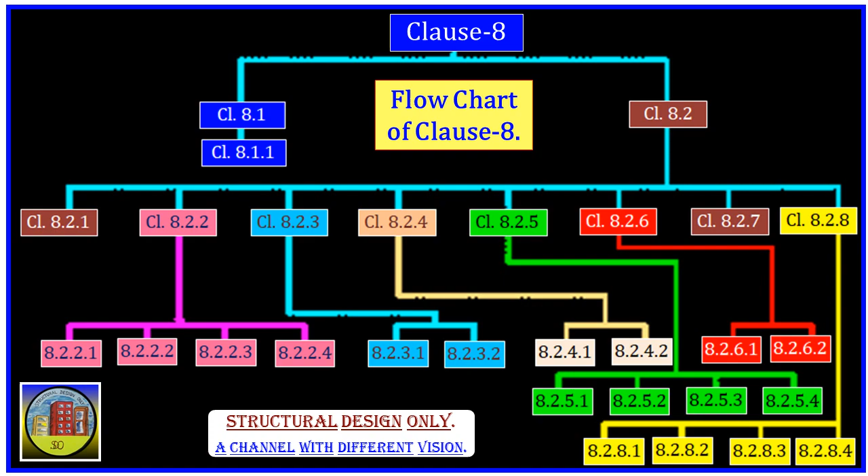Clause 8, Durability of Concrete. What is durability of concrete? Clause 8.1 gives us a general idea of the durability of concrete. A durable concrete is one that performs satisfactorily in the working environment during its anticipated exposure conditions during service. The materials and mix proportions specified and used should be such as to maintain its integrity and, if applicable, to protect embedded metal from corrosion.

Clause 8.1.1: One of the main characteristics influencing the durability of concrete is its permeability to the ingress of water, oxygen, carbon dioxide, chloride, sulfate and other potentially deleterious substances. Impermeability is governed by the constituents and workmanship used in making the concrete. With normal weight aggregates, a suitably low permeability is achieved by having an adequate cement content, sufficiently low free water/cement ratio, by ensuring complete compaction of the concrete, and by adequate curing.

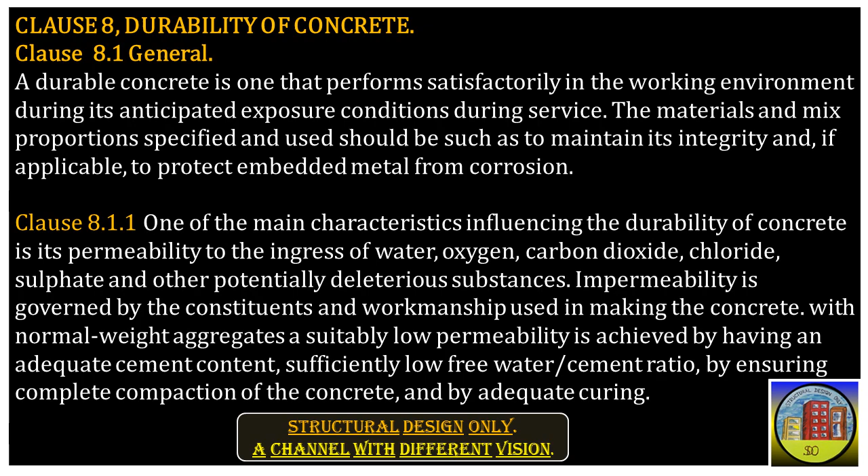The factors influencing durability include: A. The environment. B. The cover to embedded steel. C. The type and quality of constituent materials. D. The cement content and water to cement ratio of the concrete. E. Workmanship, to obtain full compaction and efficient curing, and F. the shape and size of the member.

These points are also important for examination purposes. The degree of exposure anticipated for the concrete during its service life together with other relevant factors relating to mix composition, workmanship, design, and detailing should be considered. The concrete mix to provide adequate durability under these conditions should be chosen taking account of the accuracy of current testing regimes for control and compliance as described in the standard.

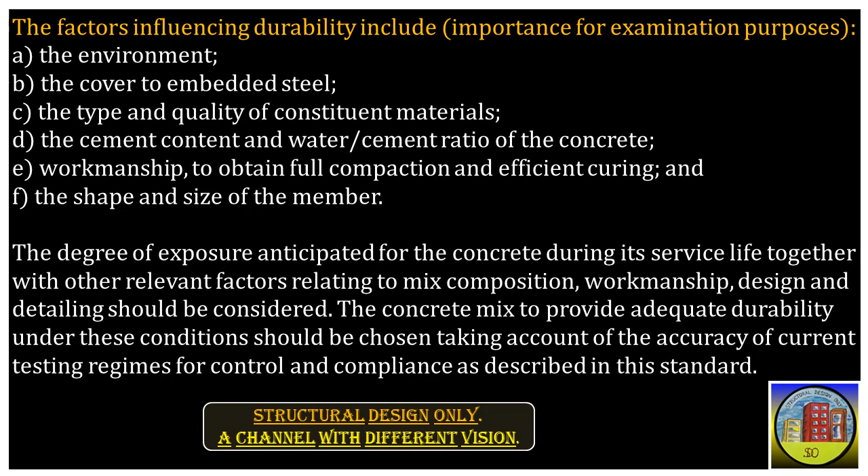Clause 8.2, Requirements for Durability. As I've shown in my flow chart, this clause has 8 subclauses, from 8.2.1 to 8.2.8. Clause 8.2.1, Shape and size of member.

The shape or design details of exposed structures should be such as to promote good drainage of water and to avoid standing pools and rundown of water. Care should also be taken to minimize any cracks that may collect or transmit water. Adequate curing is essential to avoid the harmful effects of early loss of moisture.

See 13.5. Member profiles and their intersections with other members shall be designed and detailed in a way to ensure easy flow of concrete and proper compaction during concreting.

Concrete is more vulnerable to deterioration due to chemical or climatic attack when it is in thin sections, in sections under hydrostatic pressure from one side only, in partially immersed sections and at corners and edges of elements.

The life of the structure can be lengthened by providing extra cover to steel, by chamfering the corners or by using circular cross sections or by using surface coatings which prevent or reduce the ingress of water, carbon dioxide or aggressive chemicals.

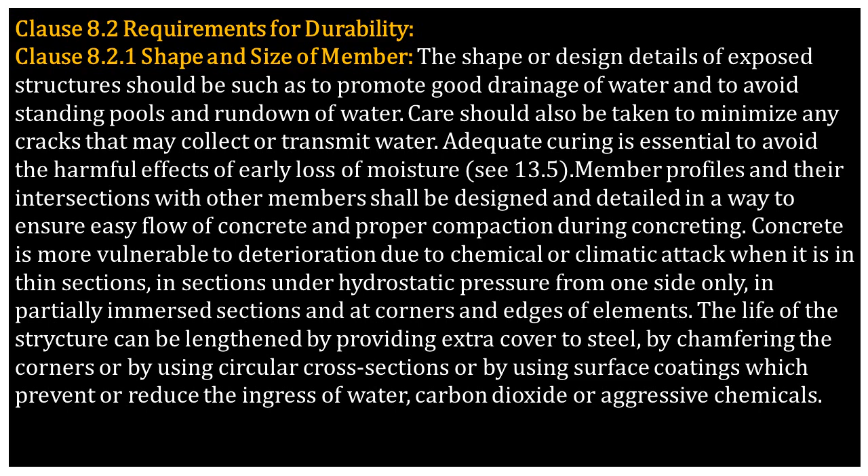Clause 8.2.2, Exposure Conditions. Under Clause 8.2.2 there are 4 subclauses, Clause 8.2.2.1 to Clause 8.2.2.4. This is Clause 8.2.2.1, General Environment. The general environment to which the concrete will be exposed during its working life is classified into 5 levels of severity, that is, mild, moderate, severe, very severe and extreme as described in Table 3.

Table 3, Environmental Exposure Conditions. It explains Clause 8.2.2.1 and Clause 35.3.2, here we are focusing on Clause 8.2.2.1 only. In Table 3, we have 3 columns.

Column number 1 is serial number. Column number 2 is environment. Column number 3 is exposure conditions.

Serial number 1, environment mild, exposure condition: concrete surfaces protected against weather or aggressive conditions, except those situated in coastal area.

Serial number 2, environment moderate, exposure condition: concrete surfaces sheltered from severe rain or freezing whilst wet, concrete exposed to condensation and rain, concrete continuously under water, concrete in contact or buried under non-aggressive soil or groundwater, concrete surfaces sheltered from saturated salt air in coastal area.

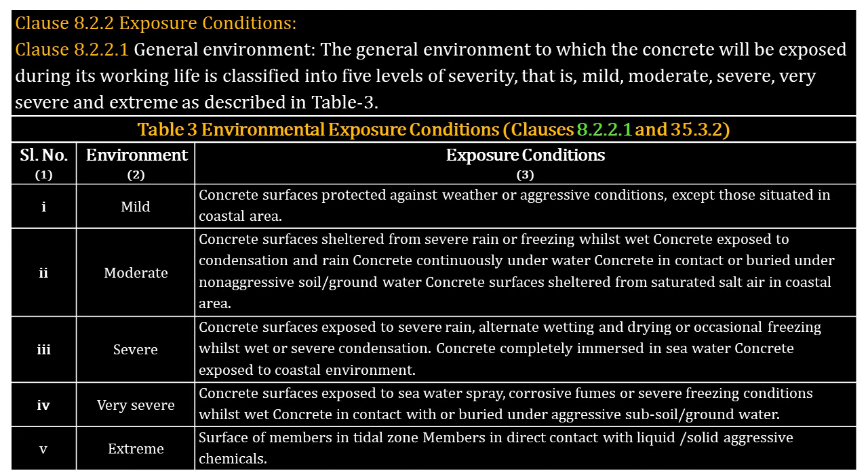When we talk about abrasive surfaces in construction, we are referring to those that are rough, harsh, gritty, corrosive, or otherwise challenging to work with. Think of surfaces that scratch, feel coarse, erode, or require grinding. Now, in situations where we encounter such surfaces, it's crucial to understand how to address them effectively.

This is where Clause 8.2.2.2 comes into play, providing valuable insights and guidelines. Let us explore its significance together. Clause 8.2.2.2, Abrasive: specialist literature may be referred to for durability requirements of concrete surfaces exposed to abrasive action, for example, in case of machinery and metal tires.

Clause 8.2.2.3, Freezing and thawing: where freezing and thawing actions under wet conditions exist, enhanced durability can be obtained by the use of suitable air entraining admixtures. When concrete lower than grade M50 is used under these conditions, the mean total air content by volume of the fresh concrete at the time of delivery into the construction should be as follows.

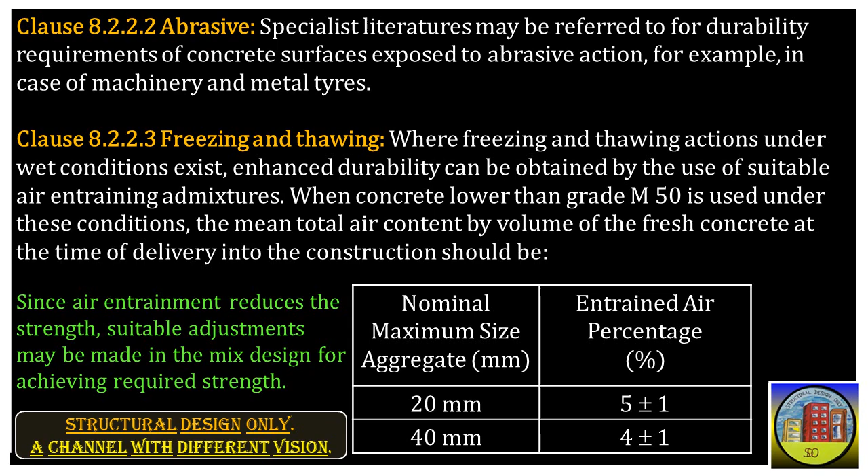Now, let's delve into Clause 8.2.2.4, Exposure to sulfate attack. Table 4 provides recommendations for the type of cement, maximum free water to cement ratio, and minimum cement content necessary at different sulfate concentrations in near neutral groundwater with a pH of 6 to 9.

In cases of very high sulfate concentrations in Class 5 conditions, it is advisable to employ some form of lining such as polyethylene or polychloroprene sheeting, or surface coatings based on asphalt, chlorinated rubber, epoxy, or polyurethane materials to prevent access by the sulfate solution.

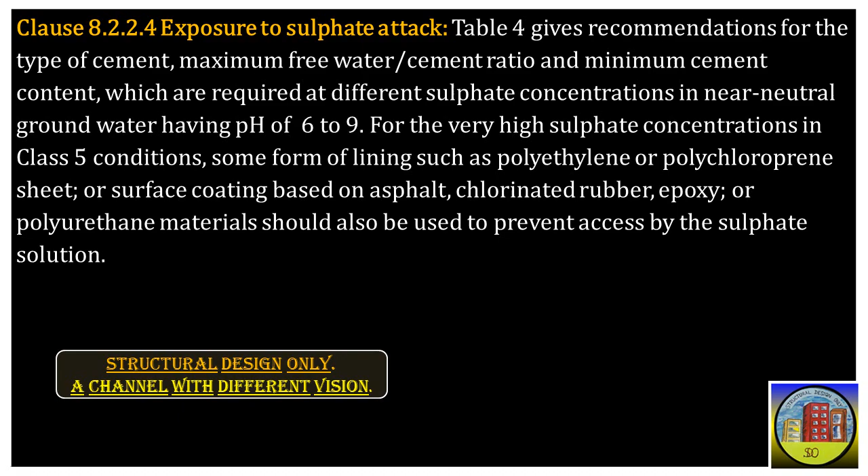This is our Table 4 as I mentioned in my last slide, requirements for concrete exposed to sulfate attack. Clauses 8.2.2.4 and 9.1.2. Currently, our focus is on Clause 8.2.2.4. This table comprises 5 main columns and 5 rows.

The first column is for serial numbers. The second column is for class designation. The third column is for concentration of sulfates, expressed as SO3, which further divides into 3 sub-columns: total SO3 in percentage, SO3 in 2:1 water to soil extract measured in grams per liter, and SO3 in groundwater measured in grams per liter.

The fourth column is for type of cement. The fifth column is for dense, fully compacted concrete made with 20 mm nominal maximum size aggregates complying with IS 383, which further divides into two columns: minimum cement content in kilograms per cubic meter, and maximum free water cement ratio.

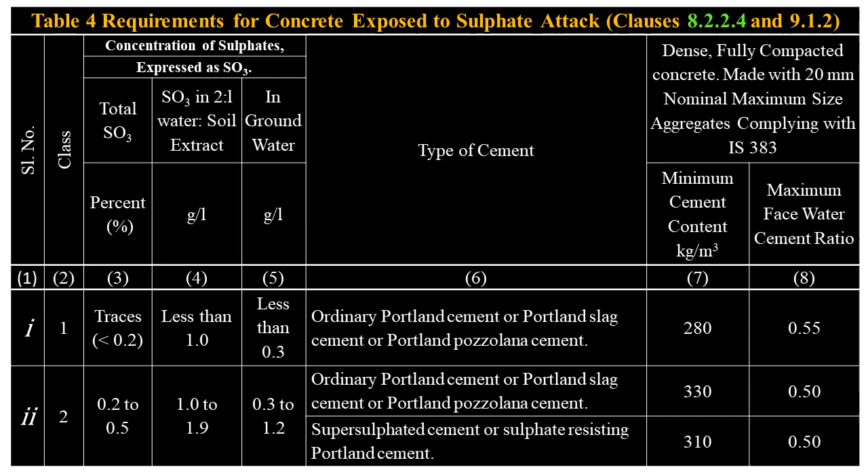Type of cements: supersulfated cement or sulfate-resisting Portland cement. Minimum cement content, 310 kilograms per cubic meter. Maximum free water-cement ratio, 0.5.

In this slide, we will continue discussing Table 4, Requirements for Concrete Exposed to Sulfate Attack, Clauses 8.2.2.4 and 9.1.2. Serial number 3, class designation 3. Total SO3 in percentage, 0.5 to 1%. SO3 in ratio of 2:1 water to soil extract, 1.9 to 3.1 grams per liter. SO3 in groundwater, 1.2 to 2.5 grams per liter.

Type of cements: supersulfated cement or sulfate-resisting Portland cement. Minimum cement content, 330 kilograms per cubic meter. Maximum free water-cement ratio, 0.5. Type of cements: Portland pozzolana cement or Portland slag cement. Minimum cement content, 350 kilograms per cubic meter. Maximum free water-cement ratio, 0.45.

Serial number 4, class designation 4. Total SO3 in percentage, 1 to 2%. SO3 in ratio of 2:1 water to soil extract, 3.1 to 5 grams per liter. SO3 in groundwater, 2.5 to 5 grams per liter. Type of cements: supersulfated or sulfate-resisting Portland cement. Minimum cement content, 370 kilograms per cubic meter. Maximum free water-cement ratio, 0.45.

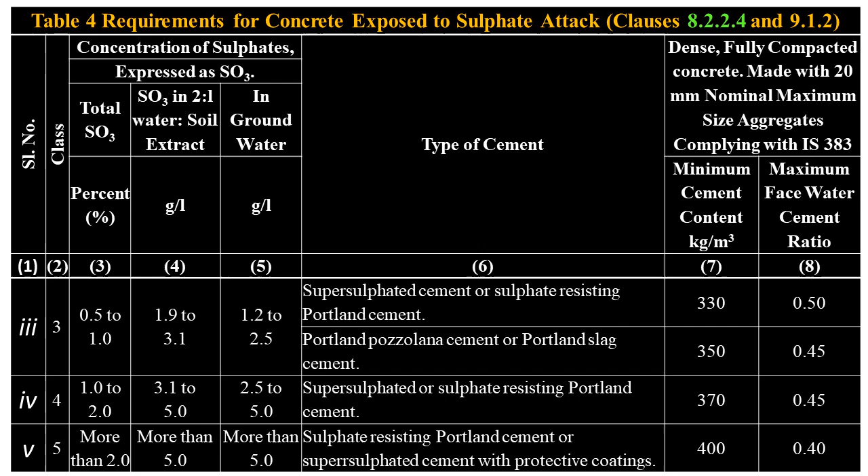Below Table 4, there are 7 important notes regarding requirements for concrete exposed to sulfate attack. They are as follows: 0.1 Cement content given in this table is irrespective of grades of cement. 0.2 Use of supersulfated cement is generally restricted where the prevailing temperature is above 40 degrees Celsius. 0.3 Supersulfated cement gives an acceptable life provided that the concrete is dense and prepared with a water-cement ratio of 0.4 or less, in mineral acids, down to pH 3.5.

0.4 The cement contents given in column 6 of this table are the minimum recommended. For sulfate contents near the upper limit of any class, cement contents above these minimum are advised.

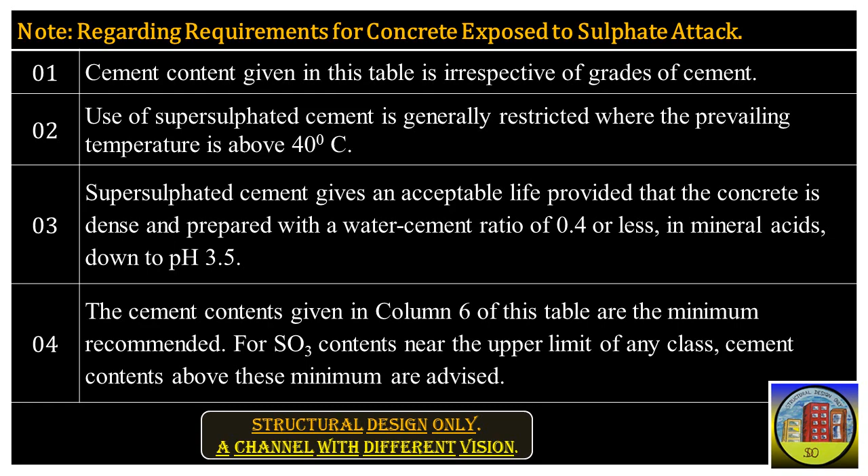This slide continues the discussion of notes below Table 4. 0.5 For severe conditions, such as thin sections under hydrostatic pressure on one side only and sections partly immersed, consideration should be given to a further reduction of water-cement ratio.

0.6 Portland slag cement conforming to IS 455 with slag content more than 50% exhibits better sulfate-resisting properties.

0.7 Where chloride is encountered along with sulfates in soil or groundwater, ordinary Portland cement with C3A content from 5 to 8% shall be desirable to use in concrete, instead of sulfate-resisting cement. Alternatively, Portland slag cement conforming to IS 455 having more than 50% slag, or a blend of ordinary Portland cement and slag, may be used provided sufficient information is available on the performance of such blended cements in these conditions. Additionally, C3A stands for tricalcium aluminate.

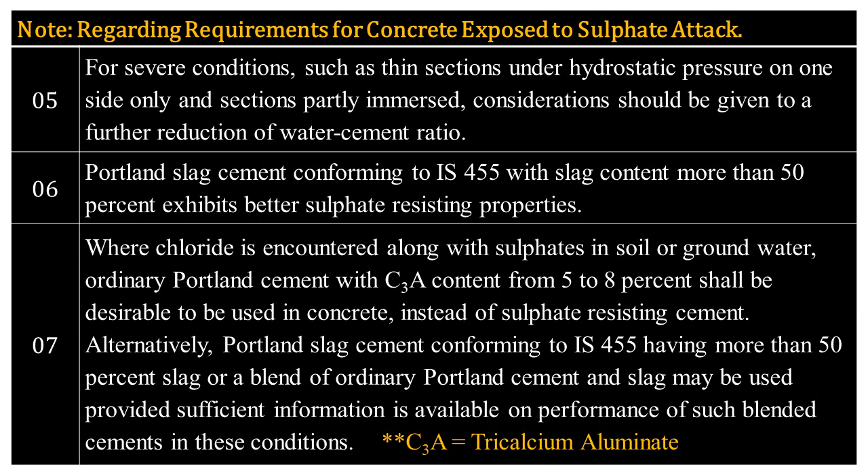On this slide, we're focusing on Clause 8.2.4, which deals with concrete mix proportions. Within Clause 8.2.4, there are 2 subclauses, namely 8.2.4.1 and 8.2.4.2. Let's begin by examining Clause 8.2.4.1, General. The free water-cement ratio is an important factor in governing the durability of concrete and should always be the lowest value.

Appropriate values for minimum cement content and the maximum free water-cement ratio are given in Table 5 for different exposure conditions. The minimum cement content and maximum water-cement ratio apply to 20 mm nominal maximum size aggregate. For other sizes of aggregate they should be changed as given in Table 6.

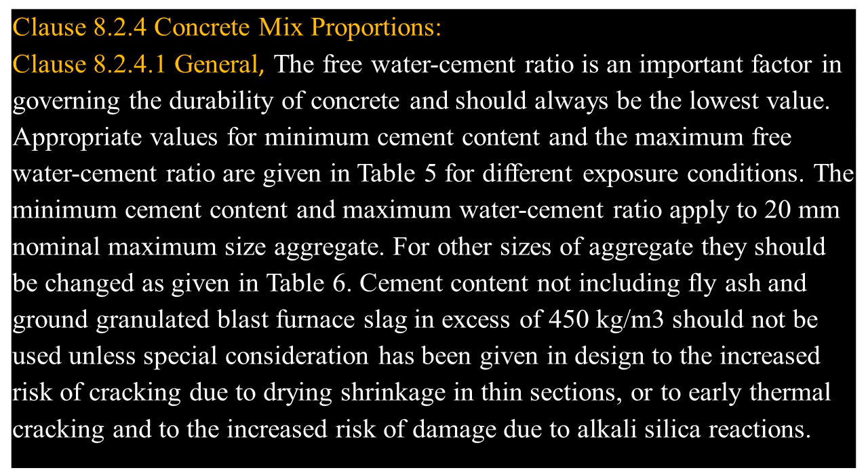Cement content not including fly ash and ground granulated blast furnace slag in excess of 450 kg per cubic meter should not be used unless special consideration has been given in design to the increased risk of cracking due to drying shrinkage in thin sections, or to early thermal cracking and to the increased risk of damage due to alkali-silica reactions.

In the preceding slide, I introduced 2 tables, Table 5 and Table 6. Let's focus on Table 5. This table provides insights into the appropriate values for minimum cement content and the maximum free water-cement ratio across various exposure conditions. The title of Table 5 is Minimum Cement Content, Maximum Water-Cement Ratio, and Minimum Grade of Concrete for different exposures with normal weight aggregates of 20 mm nominal maximum size, referencing clauses 6.1.2, 8.2.4.1, and 9.1.2.

Table 5 comprises 4 main columns and 5 rows. The first column serves as a serial number identifier, while the second column delineates exposure conditions. Moving to the third column, it addresses plain concrete, further subdivided into 3 subcolumns. These subcolumns detail the minimum cement content in kilograms per cubic meter, the maximum free water to cement ratio, and the minimum grade of concrete required.

Similarly, the fourth column focuses on reinforced concrete, also divided into 3 subcolumns. Here, we find specifications for minimum cement content, maximum free water to cement ratio, and minimum grade of concrete, pertinent to reinforced concrete structures.

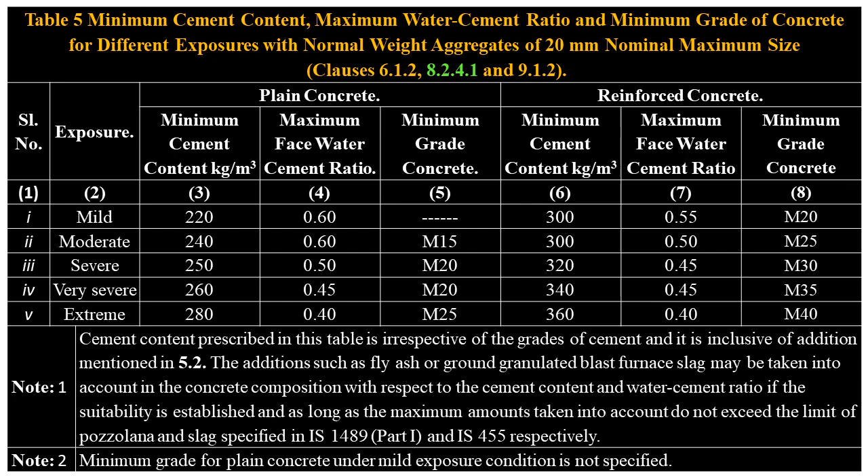Note 2: it's worth noting that the minimum grade for plain concrete under mild exposure conditions is not specified.

On this slide, you'll encounter Table 6, which details adjustments to minimum cement contents for aggregates other than 20 mm nominal maximum size, as per Clause 8.2.4.1. Additionally, Clause 8.2.4.2 addresses maximum cement content.

Table 6 consists of 3 columns and 3 rows. The first column functions as a serial number identifier. In the second column, the nominal maximum aggregate size is specified in millimeters. Transitioning to the third column, it pertains to the adjustments to minimum cement contents as outlined in Table 5, expressed in kilograms per cubic meter.

Serial number 1: nominal maximum aggregate size 10 mm, adjustment to minimum cement contents in Table 5, plus 40 kilograms per cubic meter. Serial number 2: nominal maximum aggregate size 20 mm, adjustment 0 kilograms per cubic meter. Serial number 3: nominal maximum aggregate size 40 mm, adjustment minus 30 kilograms per cubic meter. Now, Clause 8.2.4.2.

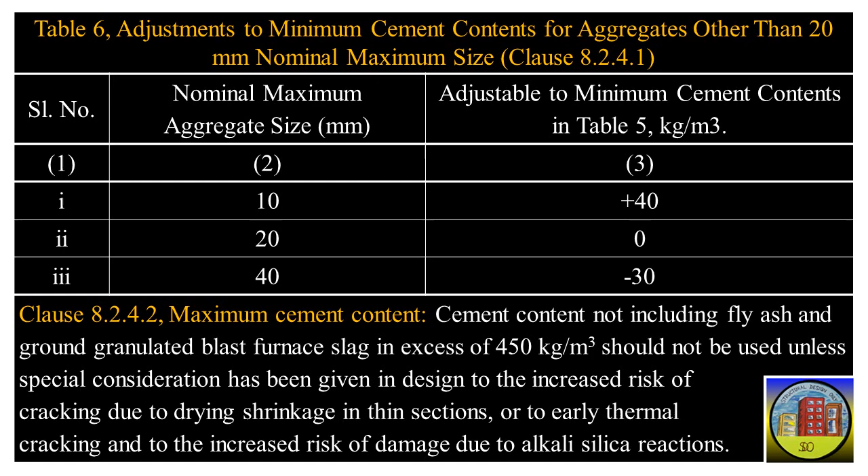In this slide, I will be discussing Clause 8.2.5.1 titled General, and Clause 8.2.5.2 titled Chlorides in Concrete, which are part of Clause 8.2.5 Mix Constituents.

Clause 8.2.5.1 General: for concrete to be durable, careful selection of the mix and materials is necessary, so that deleterious constituents do not exceed the limits.

Clause 8.2.5.2 Chlorides in concrete. Whenever there is chloride in concrete there is an increased risk of corrosion of embedded metal. The higher the chloride content, or if subsequently exposed to warm moist conditions, the greater the risk of corrosion. All constituents may contain chlorides and concrete may be contaminated by chlorides from the external environment.

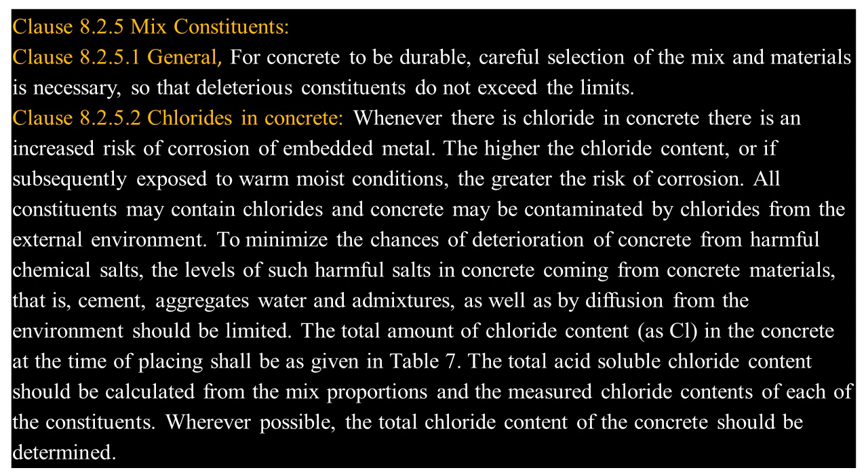To minimize the chances of deterioration of concrete from harmful chemical salts, the levels of such harmful salts in concrete coming from concrete materials, that is, cement, aggregates, water and admixtures, as well as by diffusion from the environment, should be limited. The total amount of chloride content in the concrete at the time of placing shall be as given in Table 7. The total acid-soluble chloride content should be calculated from the mix proportions and the measured chloride contents of each of the constituents. Wherever possible, the total chloride content of the concrete should be determined.

This is our Table 7, based on Clause 8.2.5.2, and the title of this table is Limits of Chloride Content of Concrete. In this table we have 3 columns and 3 rows. Column 1, Serial Number. Column 2 represents type or use of concrete, and column 3 stands for maximum total acid-soluble chloride content expressed as kg per cubic meter of concrete.

Serial number 1, type or use of concrete: concrete containing metal and steam cured at elevated temperature, and pre-stressed concrete. Maximum total acid-soluble chloride content, 0.4 kg per cubic meter of concrete.

Serial number 2, type or use of concrete: reinforced concrete, or plain concrete containing embedded metal. Maximum total acid-soluble chloride content, 0.6 kg per cubic meter of concrete.

Serial number 3, type or use of concrete: concrete not containing embedded metal or any material requiring protection from chloride. Maximum total acid-soluble chloride content, 3 kg per cubic meter of concrete.

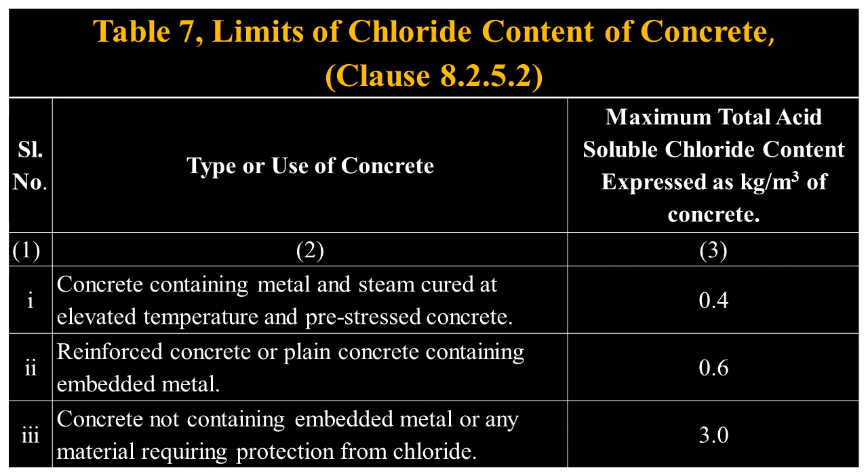In this slide, I will be discussing two clauses, Clause 8.2.5.3 titled Sulfates in Concrete, and Clause 8.2.5.4 titled Alkali Aggregate Reaction, which are part of Clause 8.2.5 Mix Constituents.

Clause 8.2.5.3 Sulfates in concrete. Sulfates are present in most cements and in some aggregates. Excessive amounts of water-soluble sulfate from these or other mix constituents can cause expansion and disruption of concrete. To prevent this, the total water-soluble sulfate content of the concrete mix, expressed as SO3, should not exceed 4% by mass of the cement in the mix.

The sulfate content should be calculated as the total from the various constituents of the mix. The 4% limit does not apply to concrete made with supersulfated cement complying with IS 6909.

Clause 8.2.5.4 Alkali Aggregate Reaction. Some aggregates containing particular varieties of silica may be susceptible to attack by alkalis, N2O and K2O, originating from cement or other sources, producing an expansive reaction which can cause cracking and disruption of concrete. Damage to concrete from this reaction will normally only occur when all the following are present together.

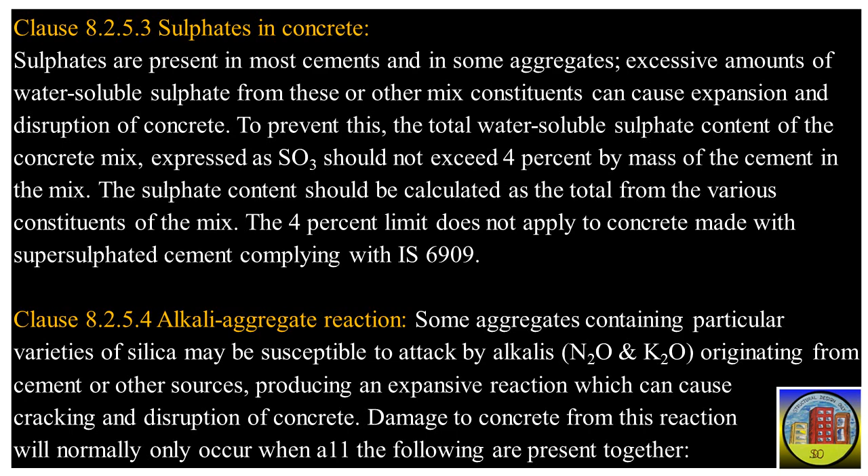This slide is a continuation of Clause 8.2.5.4, titled Alkali Aggregate Reaction, which is part of Clause 8.2.5 Mix Constituents. A. A high moisture level within the concrete. B. A cement with high alkali content, or another source of alkali. C. Aggregate containing an alkali reactive constituent.

Where the service records of a particular cement/aggregate combination are well established, and do not include any instances of cracking due to alkali aggregate reaction, no further precautions should be necessary. When the materials are unfamiliar, precautions should take one or more of the following forms.

A. Use of non-reactive aggregate from alternate sources. B. Use of low alkali ordinary Portland cement having total alkali content not more than 0.6%, as Na2O equivalent. Further advantage can be obtained by use of fly ash grade 1, conforming to IS 3812, or granulated blast furnace slag conforming to IS 12089, as part replacement of ordinary Portland cement, having total alkali content as Na2O equivalent not more than 0.6%, provided fly ash content is at least 20% or slag content is at least 50%.

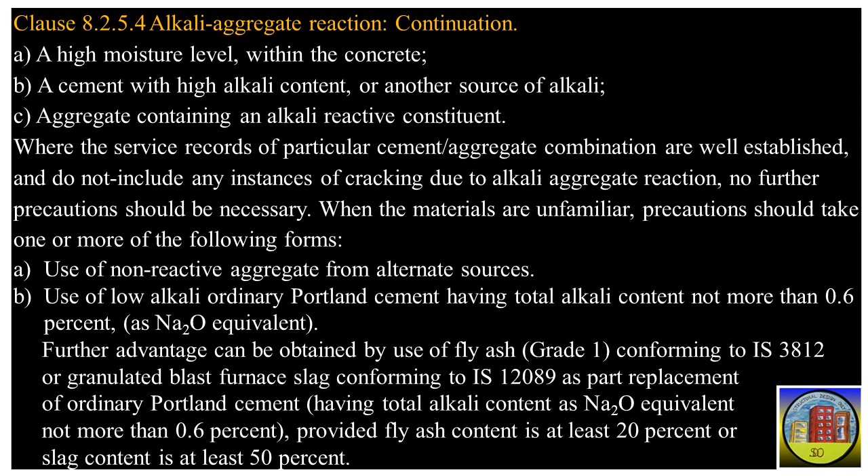Precautions for unfamiliar materials, continued. C. Measures to reduce the degree of saturation of the concrete during service, such as use of impermeable membranes. D. Limiting the cement content in the concrete mix and thereby limiting total alkali content in the concrete mix. For more guidance, specialist literature may be referred.

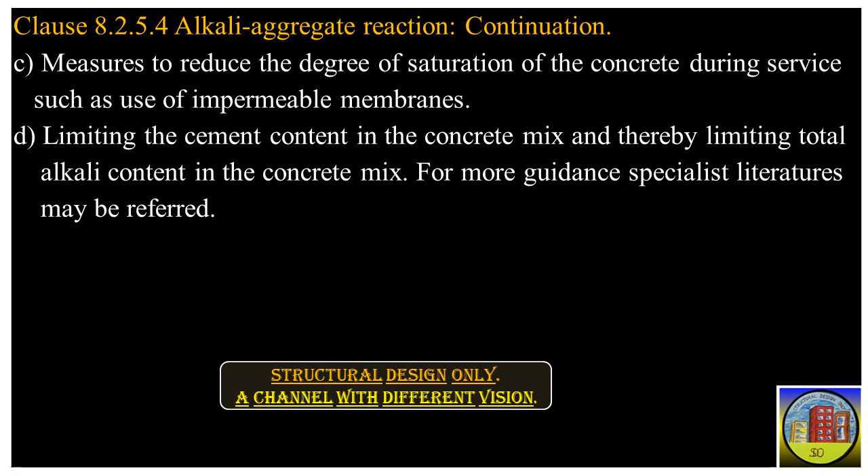Concern: some aggregates, particularly those with specific silica varieties, can be vulnerable to alkali aggregate reaction, AAR, from sources like cement, leading to concrete cracking and disruption. Conditions for damage: damage typically occurs when several factors align.

A. Use of non-reactive aggregate from alternate sources. B. Use of low alkali ordinary Portland cement having total alkali content not more than 0.6%, as Na2O equivalent. C. Further advantage can be obtained by use of fly ash, grade 1, conforming to IS 3812 or granulated blast

furnace slag conforming to IS 12089 as part replacement of ordinary Portland cement, having total alkali content as Na2O equivalent not more than 0.6%, provided fly ash content is at least 20% or slag content is at least 50%. D. Measures to reduce the degree of saturation of the concrete during service such as use of impermeable membranes.

E. Limiting the cement content in the concrete mix and thereby limiting total alkali content in the concrete mix. For more guidance, specialist literatures may be referred.

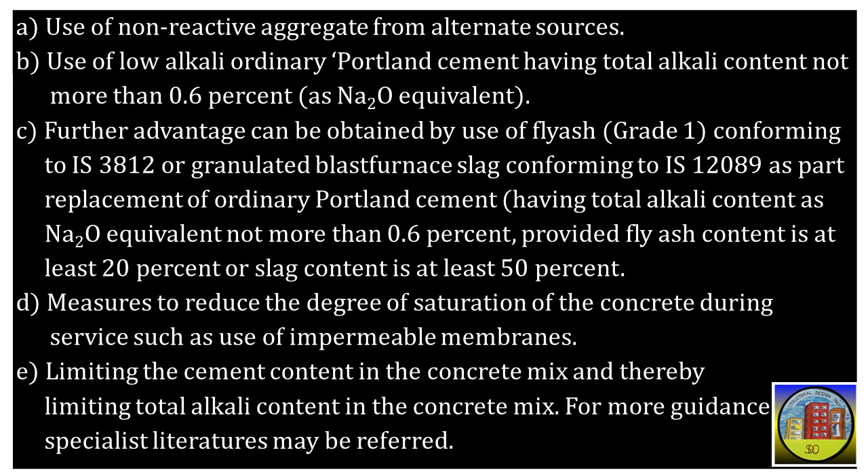In this slide, I am going to discuss clause 8.2.6, concrete in aggressive soils and water. Under this clause we have two subclauses, 8.2.6.1 and 8.2.6.2. First, clause 8.2.6.1 and the note associated with this.

8.2.6.1 General: the destructive action of aggressive waters on concrete is progressive. The rate of deterioration decreases as the concrete is made stronger and more impermeable, and increases as the salt content of the water increases. Where structures are only partially immersed or are in contact with aggressive soils or waters on one side only, evaporation may cause serious concentrations of salts with subsequent deterioration, even where the original salt content of the soil or water is not high.

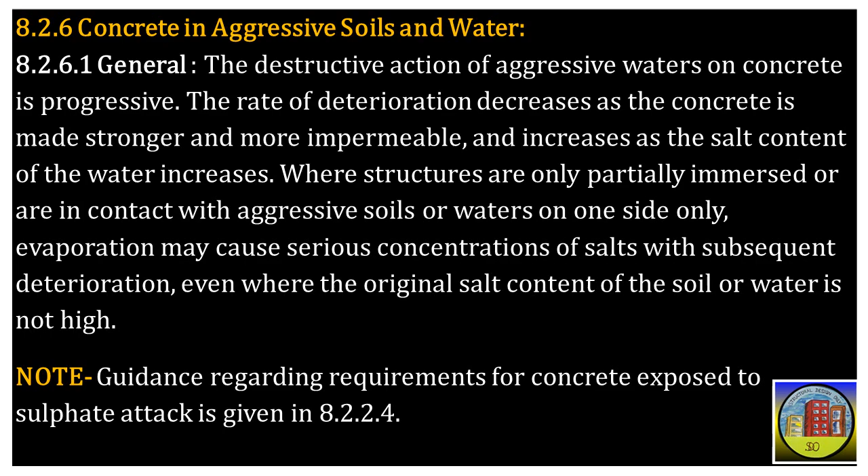Note: guidance regarding requirements for concrete exposed to sulfate attack is given in 8.2.2.4. In clause 8.2.6.2, drainage: at sites where alkali concentrations are high or may become very high, the groundwater should be lowered by drainage so that it will not come into direct contact with the concrete.

Additional protection may be obtained by the use of chemically resistant stone facing or a layer of plaster of Paris covered with suitable fabric, such as jute thoroughly impregnated with bituminous material.

Now it is clause 8.2.7, compaction, finishing and curing. Adequate compaction without segregation should be ensured by providing suitable workability and by employing appropriate placing and compacting equipment and procedures. Full compaction is particularly important in the vicinity of construction and movement joints and of embedded water bars and reinforcement.

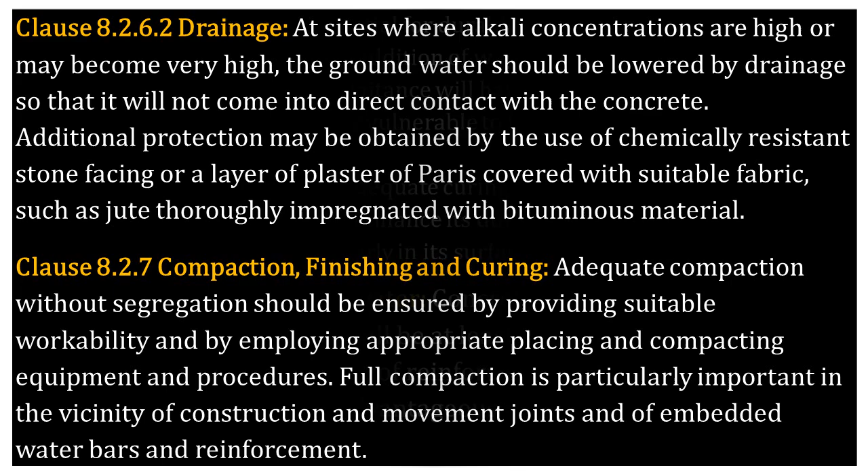In clause 8.2.7, titled Compaction, Finishing, and Curing, emphasis is placed on the significance of good finishing practices for ensuring durable concrete. It's advised to refrain from overworking the surface or adding excess water or cement during finishing, as this can result in weakened strength and durability, especially vulnerable to freezing and thawing in wet conditions due to the formation of laitance. Furthermore, proper and adequate curing techniques are highlighted as essential for reducing concrete permeability and enhancing durability.

Effective curing extends the hydration of the cement, particularly crucial for the surface zone of the concrete, refer to clause 13.5, to ensure optimal strength and durability.

Clause 8.2.8, concrete in seawater. Concrete in seawater or exposed directly along the sea coast shall be at least M20 grade in the case of plain concrete and M30 in case of reinforced concrete. The use of slag or pozzolana cement is advantageous under such conditions. Under this clause we have four subclauses: 8.2.8.1, 8.2.8.2, 8.2.8.3 and 8.2.8.4.

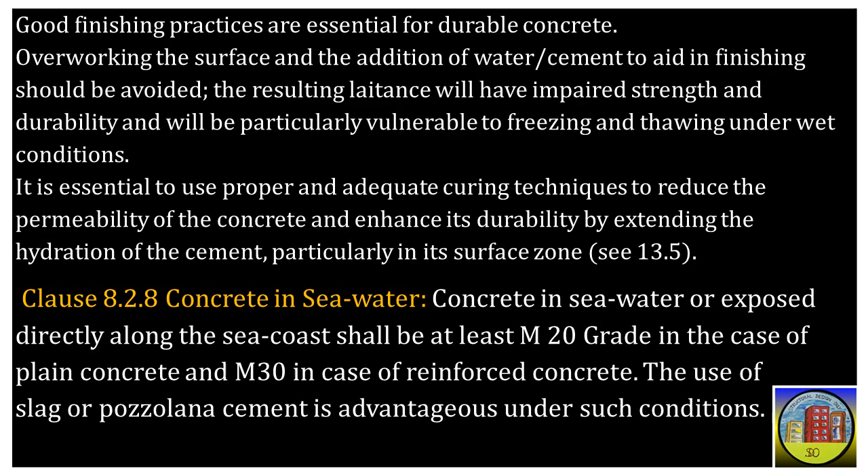Clause 8.2.8.2: as far as possible, preference shall be given to precast members unreinforced, well cured and hardened, without sharp corners, and having trowel smooth finished surfaces free from crazing, cracks, or other defects. Plastering should be avoided.

Clause 8.2.8.3: no construction joints shall be allowed within 600 mm below low water level or within 600 mm of the upper and lower planes of wave action. Where unusually severe conditions or abrasion are anticipated, such parts of the work shall be protected by bituminous or silico-fluoride coatings or stone facing bedded with bitumen.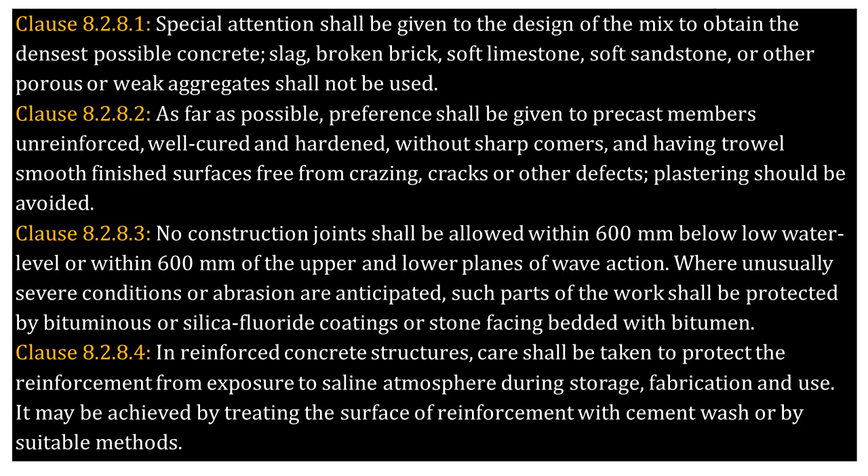And with that, we conclude the commentary on IS 456, 2000, Part 15, of this series. I trust you found this video informative and engaging. Stay tuned for my next video, which will delve into Clause 9, Concrete Mix Proportioning.